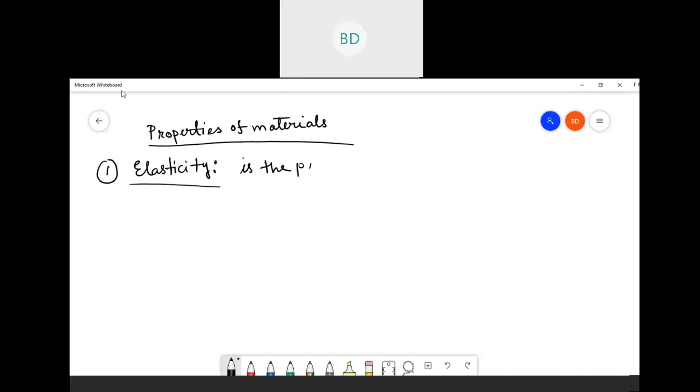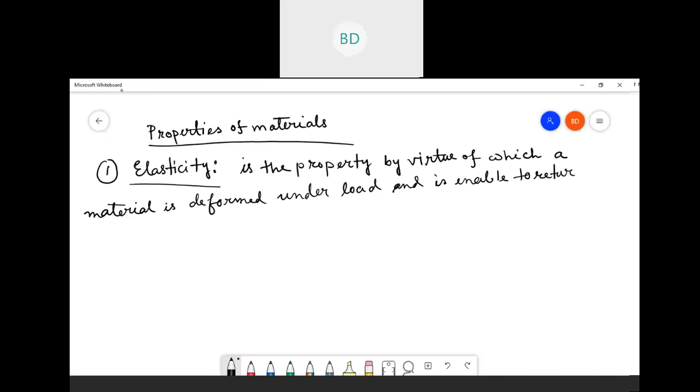Properties of materials. Number one, elasticity. So you write down: elasticity is the property by virtue of which a material is deformed under load and is able to return to its original dimension when the load is removed.

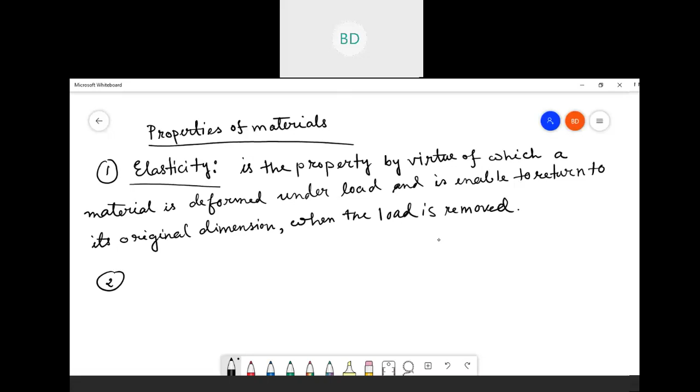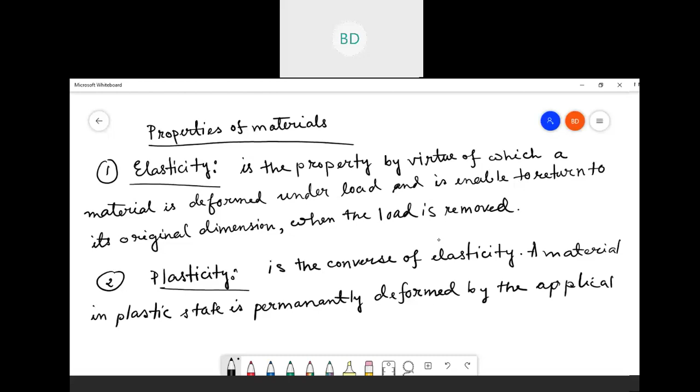Number two, you write plasticity. It is the converse of elasticity. A material in plastic state is permanently deformed by the application of load, and it has no tendency to recover.

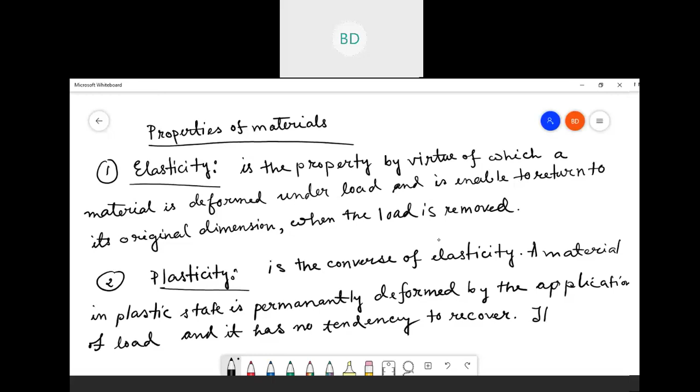The characteristic of material by which it undergoes inelastic strains beyond those at elastic limit is known as plasticity.

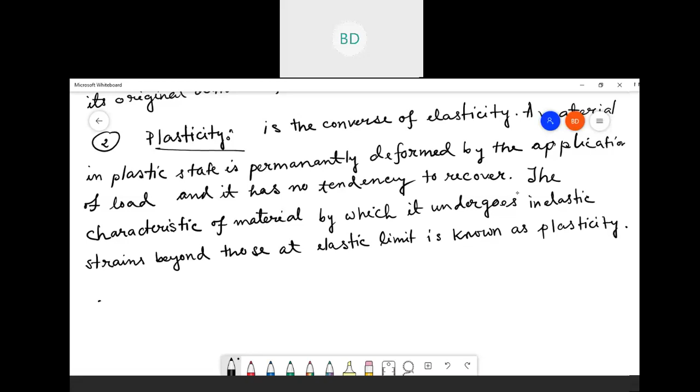Next, you will write ductility. This is the characteristic which permits the material to be drawn out longitudinally to reduce section, under the action of a tensile force. But this tensile force is very large, so large deformation occurs.

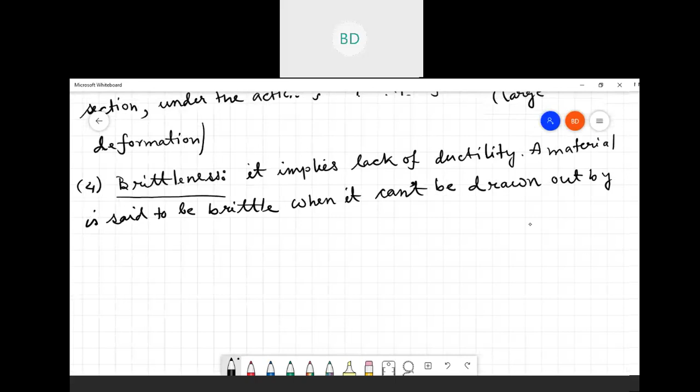Number four, brittleness. The brittleness implies lack of ductility. The material is said to be brittle when it cannot be drawn out by tension to a smaller section.

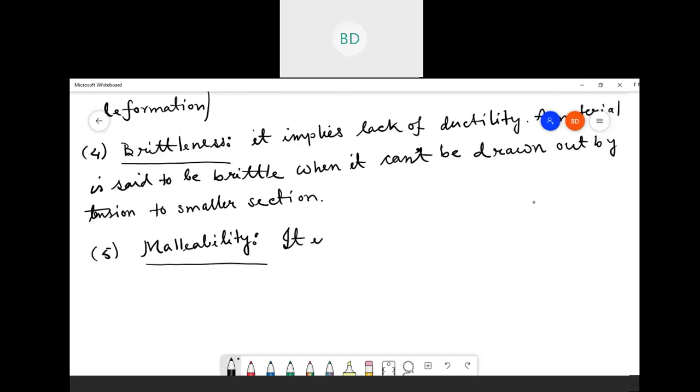Number five, you write malleability. It is the property of a material which permits the material to be extended in all directions without rupture. Rupture means fracture.

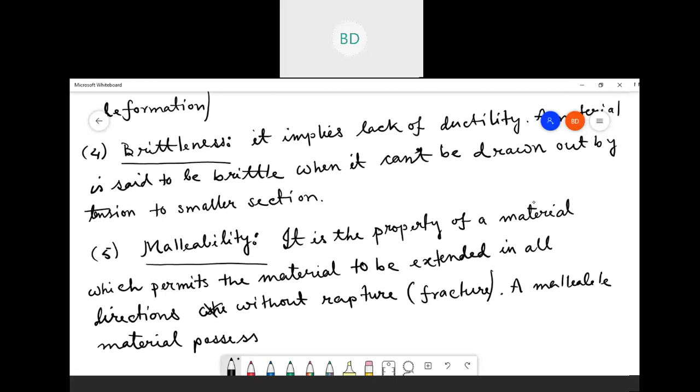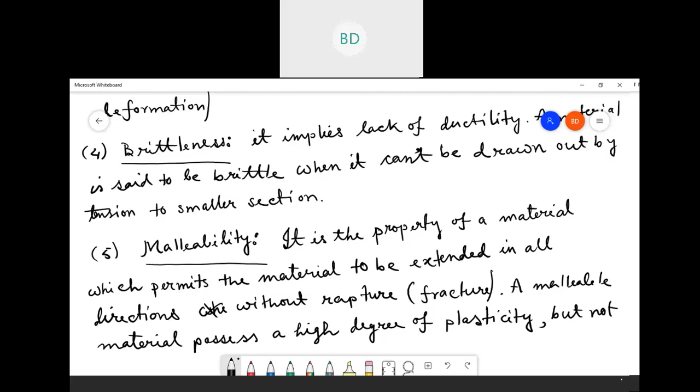Malleable material possesses a high degree of plasticity, but not necessarily great strength.

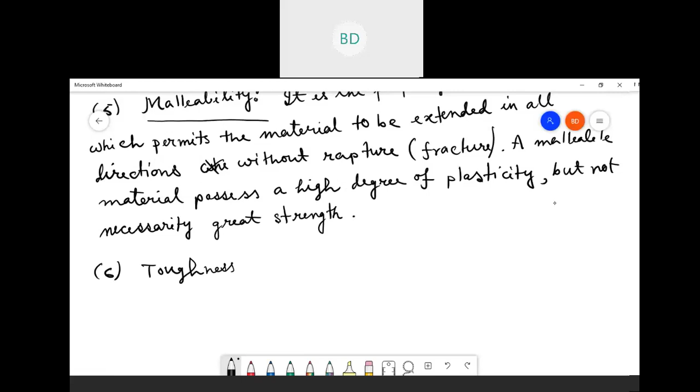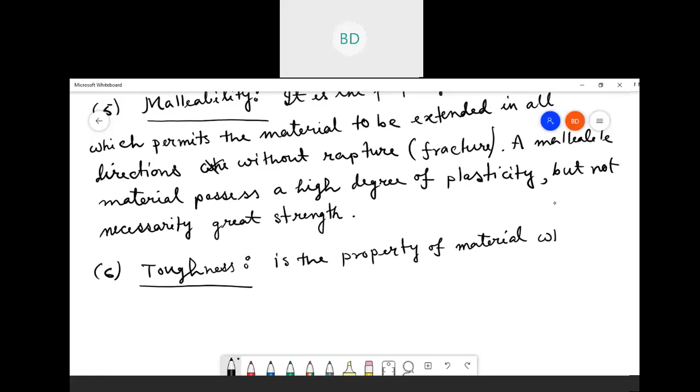Next, write toughness. It is the property of a material which enables it to absorb energy without fracture.

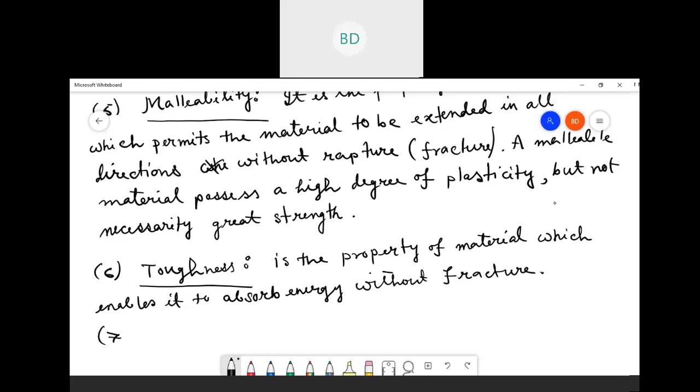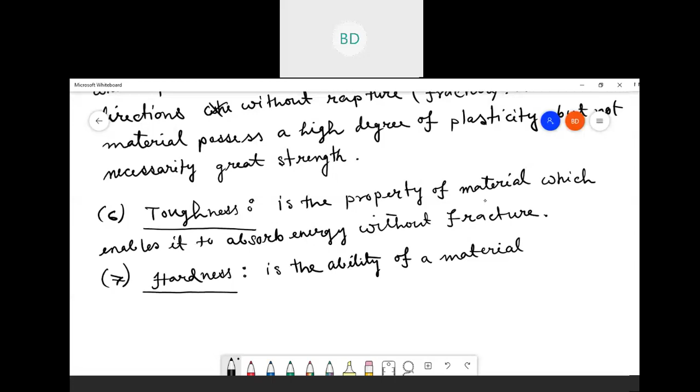Number 7, hardness. It is the ability of a material to resist indentation. Indentation means marking, you can say in simple language, or surface abrasion.

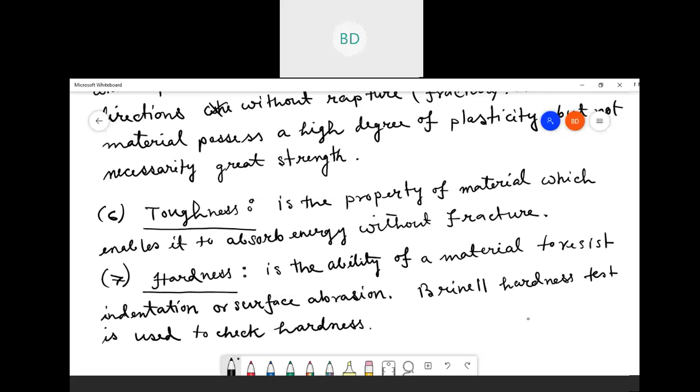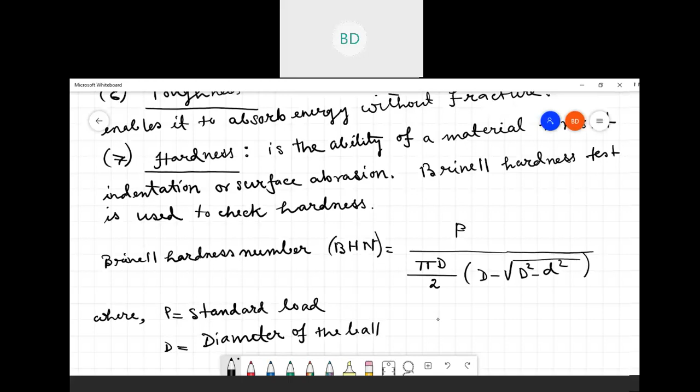Brinell hardness test is used to check hardness. Another test is also there, Rockwell test. The Brinell hardness number, BHN, is equal to P divided by (pi D by 2) times (D minus root over capital D square minus small d square), where P is your standard load, capital D is the diameter of the ball - there is a diamond ball or steel ball actually for making that indentation - and small d is the diameter of the indent.

So let me come one by one. Am I audible? Now I have to speak actually. Hello, am I audible? So first of all, you have elasticity. Elasticity is a very basic property of any material.

Elasticity can be defined as the material property by virtue of which, if you pull or push something with some load up to a certain level, and after that remove it, if it is an elastic material, then it will regain its original dimension as soon as you remove the load.

Likewise we can define plasticity. If you further go on increasing your load and remove it, it will persist, or it will acquire a permanent deformation in that particular material, and that property is called your plasticity. So this is very simple.

So ductility also you are knowing about that. Ductility means the material - suppose aluminum, suppose magnesium - these are ductile materials. Why ductile? Because the property is like if you pull, suppose an iron rod, with a tremendous force, then you will see that its length will go on increasing, but its radius will reduce.

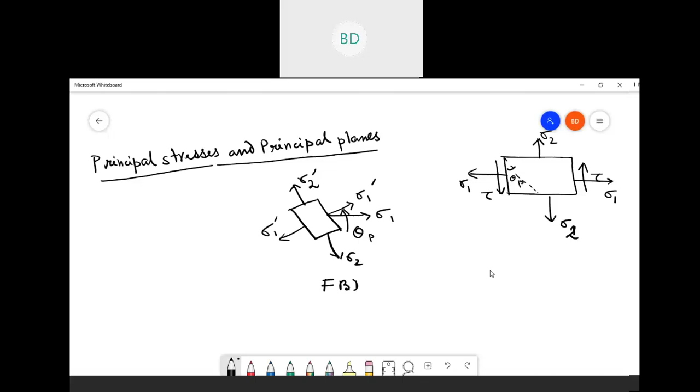So this angle again is theta p. Okay, so this is sigma 1. Now come to the definition.

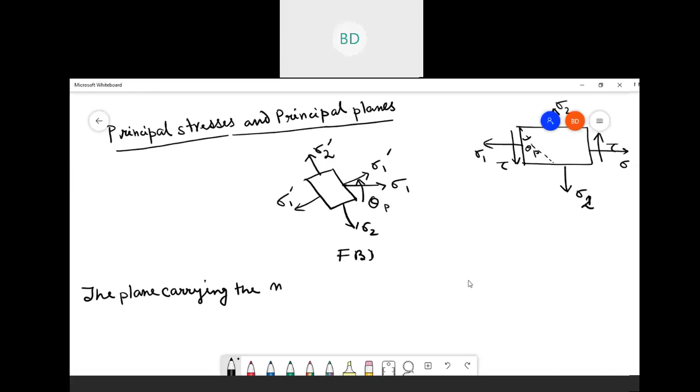The plane carrying the maximum normal stress is called the major principal plane, and the normal stress is called major principal stress.

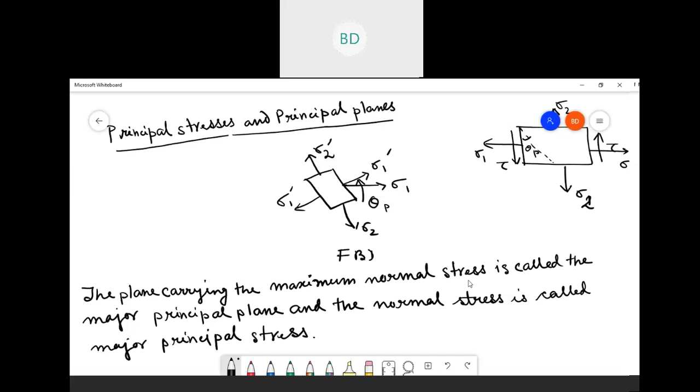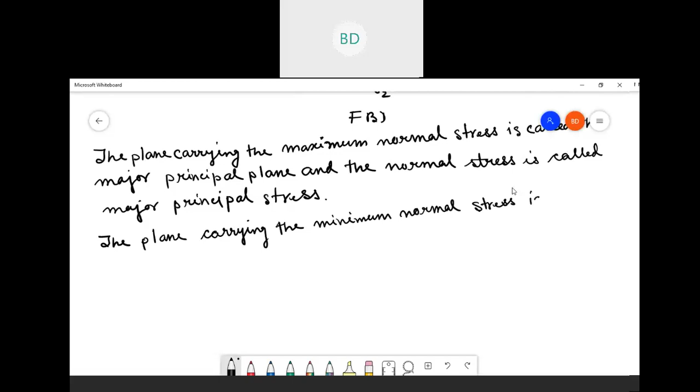The plane carrying the minimum normal stress is known as minor principal stress.

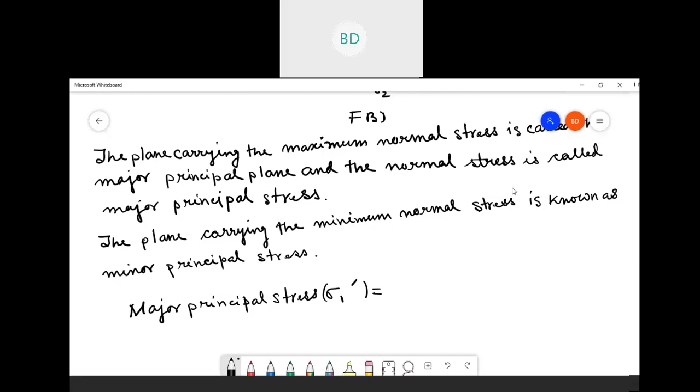So major principal stress in the oblique plane, stress sigma 1 dash is equal to sigma 1. So this is the same formula only, but this is analytical: sigma 1 plus sigma 2 by 2, plus root over sigma 1 minus sigma 2 by 2 whole square, plus tau square. This you have to remember, it's important from a numerical point of view.

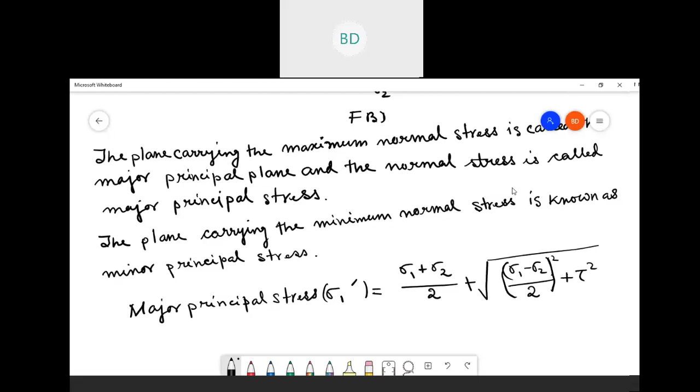So this is the major one. We have another one, minor principal stress. Sigma 2 dash is equal to the same only with a negative sign: sigma 1 plus sigma 2 by 2, minus root over sigma 1 minus sigma 2 by 2 whole square plus tau square.